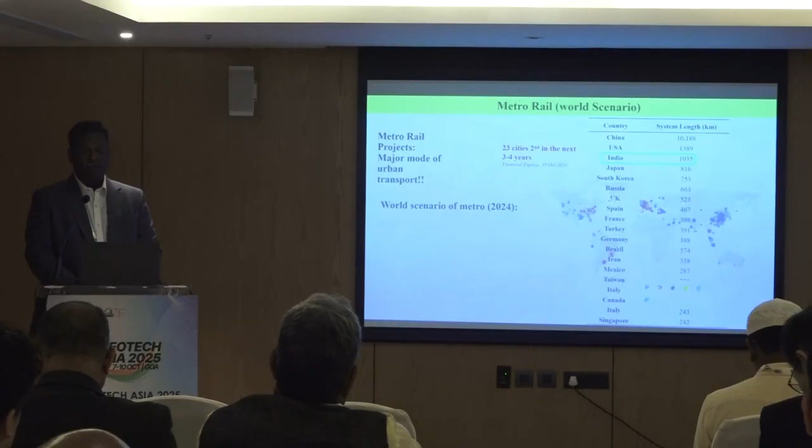A lot of metro rail project initiatives have been taken in India. If you look globally also, the running kilometer length of the metro has been given. India is currently third, and with the kind of metro projects being projected and running in another 23 cities, it is going to be the second largest metro network in the world in the coming 3 to 4 years. We are currently having an operational length of about 1035 kilometers.

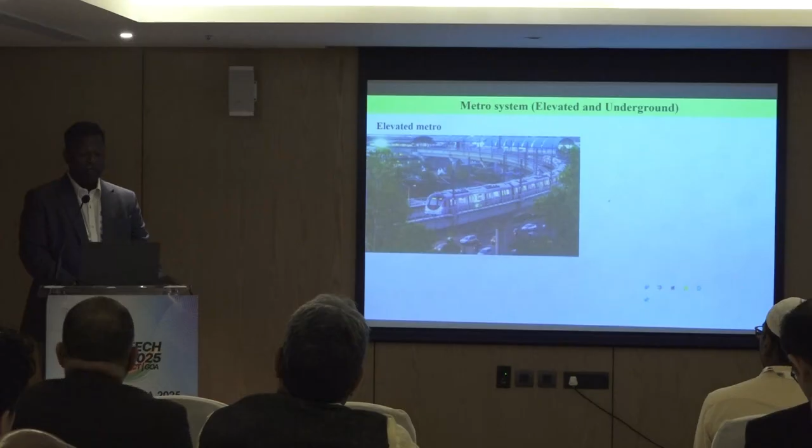But many times, for certain geographical locations where we would like to develop connectivity, it is not possible to go elevated because the existing density of building population is going to be much larger. So the only way is to go underground. If other options are ruled out, then we go for the underground metro option.

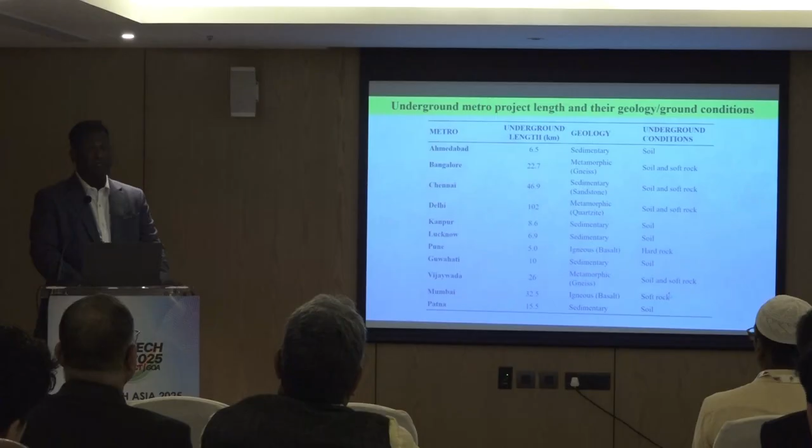Advantages, no need to say, in densely populated buildings where you want to protect heritage structures—in all those cases when there is no space available for an elevated corridor, we go for an underground metro. This is the geological condition the underground metro is experiencing in Indian regions: many sites were soil and some sites were rock, even hard rock—a wide range of geological conditions.

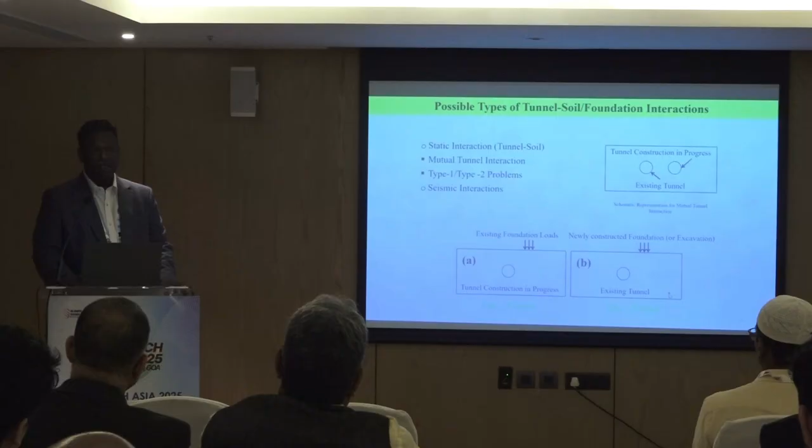So what is the problem we are going to address? Basically, underground tunnel construction involves two problems. The first is the effect of tunneling-induced excavation on existing structures. That is an important problem to address, and quite a bit of work has already been executed.

Guidelines are available in different country codal provisions. Even Professor Loganathan has established guidelines, and textbooks are available to evaluate the safety of existing buildings due to tunneling-induced excavation or deformation, whether it is a shallow foundation or deep foundation. Many metro projects actually execute this, identifying the conditions of the building before excavation.

Then during excavation they monitor it, and they also have backup plans in case the monitored deformations and stresses are alarming. So this is being followed as a regular routine practice.

But what would happen if these tunnels are already constructed and become an attraction point for future development? A lot of new development comes close to this existing tunnel alignment. So then what will happen to the safety of this existing tunnel? This problem was not extensively studied.

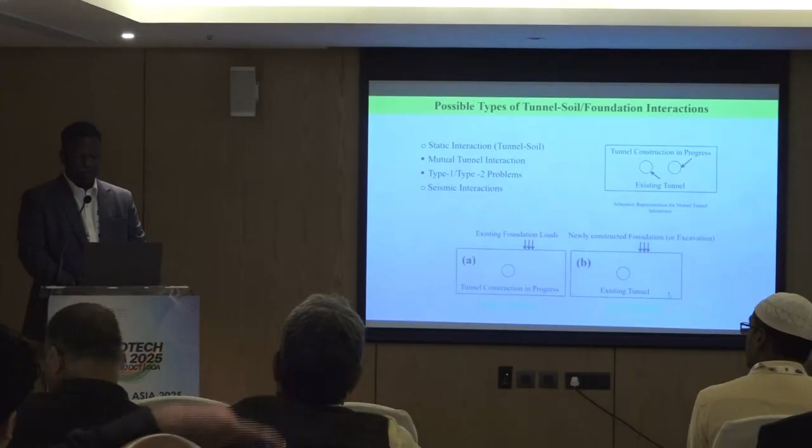We started this work way back in 2010, and for the last 15 years we have been extensively working on this. Some of the findings I am going to present today. So our problem is: what is the effect of new construction or new excavation activity close to an existing tunnel, how will the tunnel behave, and how do we ensure these existing tunnels are safe.

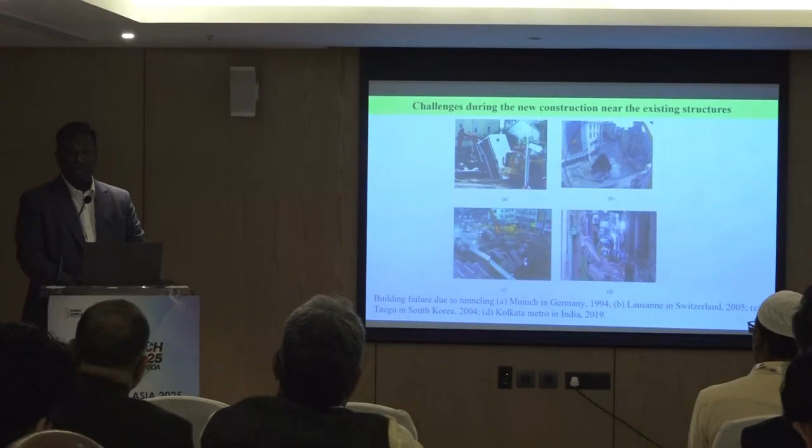As I said, the first category of problem—when you do tunneling, what happens to the pile foundation, how they will deform—these guidelines are already available. But the challenge is that a lot of damage to existing structures has been observed, and is being taken care of. Even in India, Kolkata Metro in 2019 had some damages due to tunnel-induced excavation. This problem is still being researched because existing guidelines continue to evolve as we experience more failures. We learn from the failures, which helps improve the guidelines and monitoring mechanisms.

The kind of strain that the tunnel lining experiences—in some loading it will be compressive in nature, and in another loading condition it will be tensile in nature—needs to be understood, because if the tunnel concrete lining develops tensile strain beyond the permissible limit, it will start developing cracks. These cracks will propagate with time, and the long-term durability of the lining will be affected under groundwater and submerged conditions.

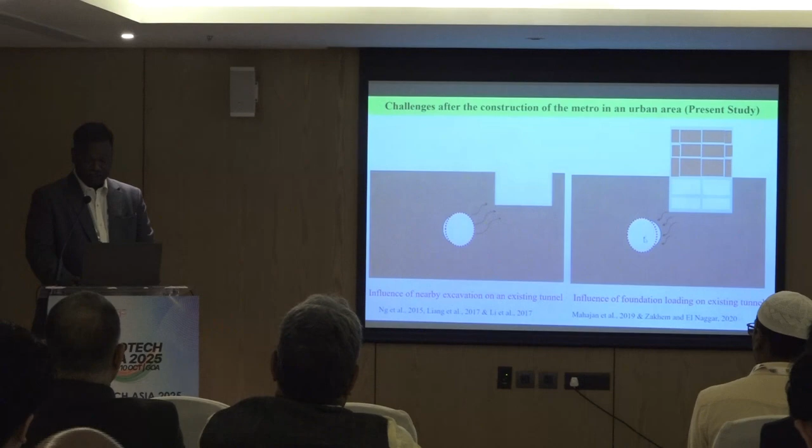Such failures are also reported on tunnel linings, and these are some case studies reporting lining distress, dislocation, or cracks developed at junctions due to new construction activity—which is the focus of attention we want to address.

As I said, basically traffic and land availability is a big issue, therefore we go for this. Typically even a raft foundation or shallow foundation is not likely to produce a deeper pressure bulb. Tunnels are generally about 18-20 meters deep—that's a minimum for a single alignment, unless two lines are crossing, where the second line may go to a deeper depth of 30-35 meters. But then the shallow foundation pressure bulb is very confined to a shallow depth. These days, however, basements are increasing in depth.

We are actually utilizing the underground basement space. In India, 5 basements have already been constructed in Ahmedabad, so we can understand how deep we are going for the basement. Also, when 2 metro lines intersect, we require a depth of excavation of the order of 40 meters, so they are definitely going to interact with the nearby existing tunnel.

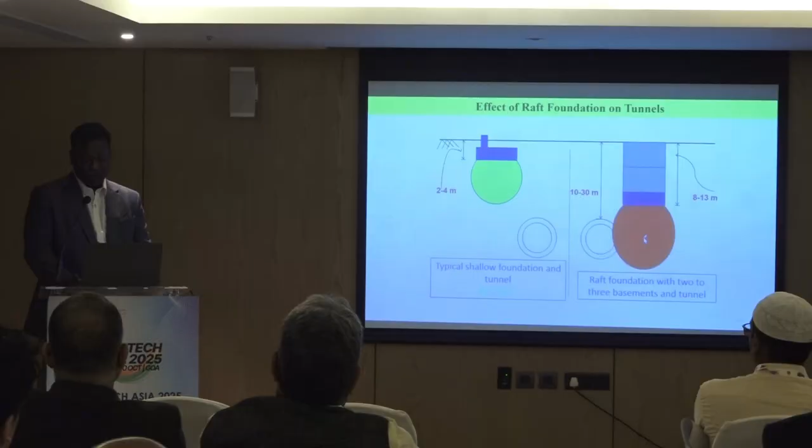Therefore it is very important to investigate this, and in this study we considered up to 3 basements, which is most common. 5 basements is very rare and unusual, and can be carried out as a site specific study. We studied the effect of 3 basement excavation up to a 20-story building, the tallest building normally constructed around Delhi, since we initially considered Delhi as the study region. Of course, this can be further extended to cities like Mumbai, where the number of stories goes much taller.

These are the different parameters that we varied: the horizontal offset distance between the proposed raft foundation and the tunnel lining, the magnitude of loading, and the depth of tunnel cover, since between the elevated and underground sections there will be a transition zone where the tunnel is of shallow depth. So we varied the depth of tunnel as well as the depth of foundation, along with different sizes and orientations of the raft foundation.

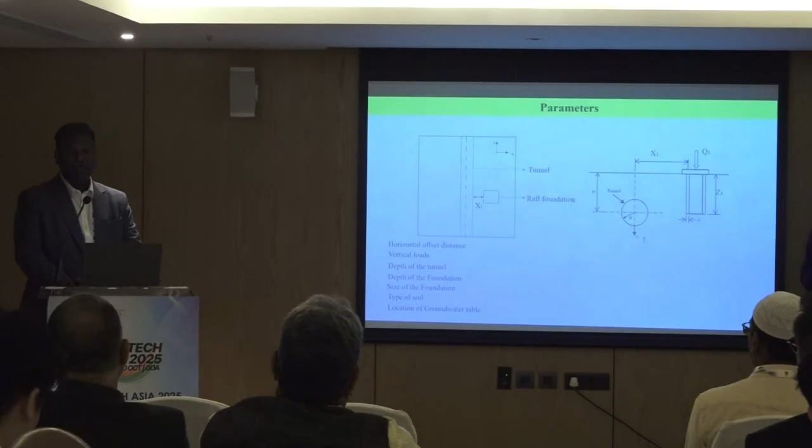A very comprehensive numerical analysis was carried out. But in experiments we could only do a limited study, because geotechnical model testing involves a lot of effort. So we varied the effect of water table also in our experimental study. Concrete stiffness would be too strong to show any strain in the model experiment.

We needed to scale it down, so we used a flexible material called HDPE pipe to simulate the tunnel, and scaling laws were employed to achieve the same flexibility ratio in the field as in the simulated model.

Two soil conditions are very predominant in the Delhi region: one is Yamuna sand close to the Trans-Yamuna river region, and in the western and southern parts of the region, silt is predominant. So we accounted for a wide range of soil conditions.

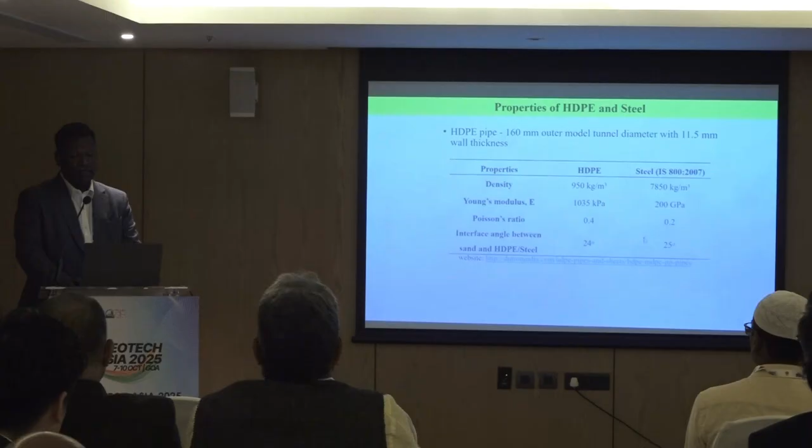We carried out characterization of this basic soil, and scaling laws, as I mentioned, were followed. This is the property of the HDPE model tunnel that we used, and of course the steel as well.

To simulate the basement raft cum retaining wall, which in the field would be RCC, we scaled it down to a steel one. This is the basement raft and retaining wall, which we fabricated integrally, since in the field the raft cum retaining wall is also monolithic. We simulated the same thing.

For carrying out excavation, we need a sheet pile wall, which we designed based on the prototype 3 basement depth of 12 meters. After scaling, we arrived at the thickness and everything. The only difference is that in the field, for 3 basements, you would be using struts and other supports - an anchored sheet pile wall would be used.

But in the model test, confining stress is very low due to the very small depth, so that was not required. With the cantilever sheet pile wall itself, we were able to do the excavation. This is the sheet pile wall that was fabricated to simulate 2 basement and 3 basement conditions.

This is the model setup that we used - a test tank of about 1.2 meter by 1.2 meter by 1.5 meter height. This is the model tunnel lining where we used instrumentation to measure strain in both the longitudinal and circumferential directions.

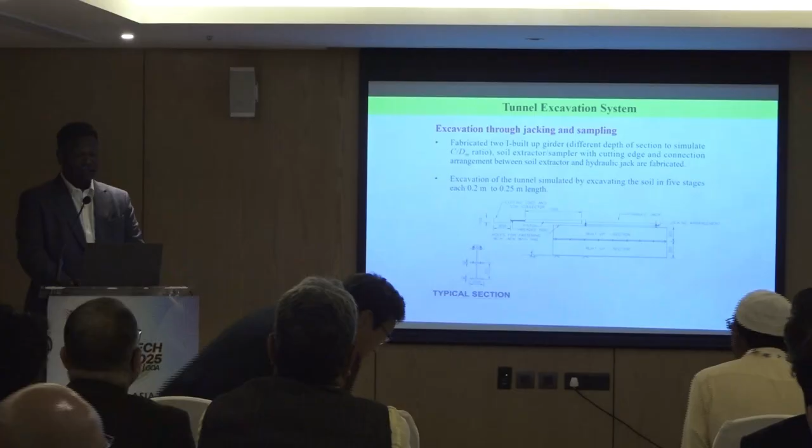A data logger was used - a 48 channel data logger from HBM, Germany. The excavation was done by a tunnel excavation system designed and fabricated in-house, using a hydraulic jack placed horizontally that pushes the sampler into the tunnel to remove the soil within the tunnel during excavation.

This is the extension rod, which can be connected to reach a deeper horizontal length of excavation inside the tunnel. The soil bed has to be prepared at a particular density, and we took 60% relative density, which is predominantly available around the Delhi region.

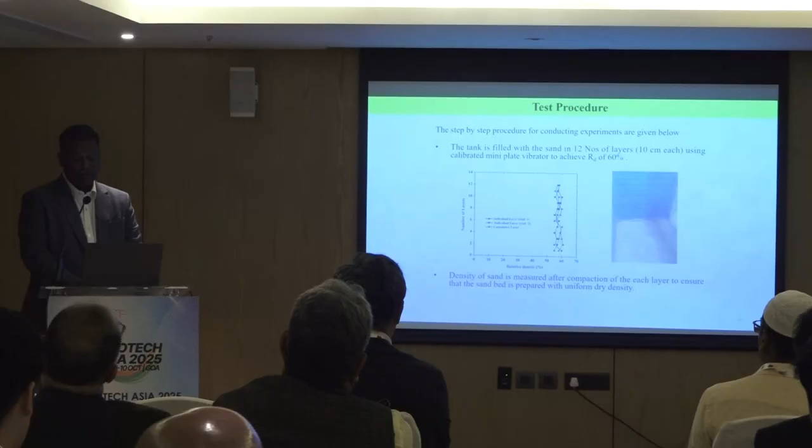In order to prepare that, we had a calibrated method - a plate vibrator method was used to compact the soil, and we verified this through several trials to check repeatability. We were able to achieve about 55 to 60% relative density.

And this is the way, yeah. Okay, sure.

Almost done. This is the way the soil bed was prepared. A pre-filled tunnel lining was placed, and then subsequently the other layers were placed. Then the tunneling was done through the excavation system. Then the soil excavation within the sheet pile was done. Then we lowered the retaining wall with basement, and subsequently building loads were applied. So this is the way it was simulated.

Their construction stages are mentioned here, and we have monitored the strain which are presented here. We can see the first stage, excavation number 2, that is the excavation stage, and subsequently the other stage includes increasing the loading phases of the additional floors.

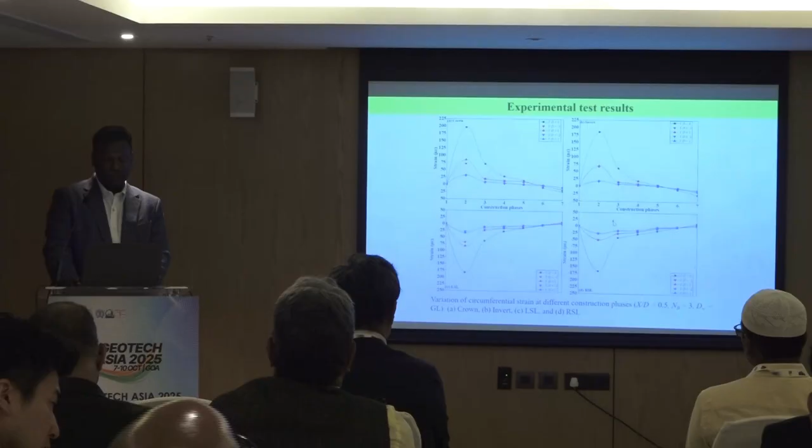What we observed is that the longitudinal strain is relatively smaller compared to the circumferential strain, because your tunnel is running longitudinally and you are excavating in a specific layout of raft. So more effect is on the circumferential direction rather than in the longitudinal direction.

Tensile strain was generated at the crown during the excavation, and the opposite at the springing level. But when you go for the loading, the strain direction changes, whereas the crown experiences compressive strain and the springing levels experience the opposite. So that means there is a strain reversal.

If that kind of cyclic strain happens under fatigue, the concrete is more vulnerable to fracture, cracking actually. These cracks may not cause significant instantaneous collapse, but with time, when moisture ingress happens in the submerged condition, it will also deteriorate the reinforcement bar in the lining. The long-term stability is going to be affected, and one fine day if you do not monitor this, a sudden collapse may occur actually.

So therefore, when we do any new construction, it is important to monitor at critical locations, and in order to identify critical locations, our findings would be helpful to decide where to place the sensors to monitor during new construction operations. In fact, in some cases the permissible strains were exceeded. 150 micron is the permissible strain, and in some construction cases we found that it is exceeding the permissible limits.

It would have been ideal, or at least to compare the data, if you had shown a borehole log data of those foundations, deep foundations versus shallow foundations, because you're talking about SPT numbers up to 50. It's very good strata, but in this locality we already know that 3 to 4 meters is hard strata, and below that you have very soft material, shaly soil or something you call it, right? Would be laterite, yeah. So is there any challenge that you see, or is it something your pressure distribution accounts for?

Yeah, maybe. Very well, very well. I hope you have taken care of those conditions. Yes, sir, this bridge is already in operation. I know, sir, I know. There is no doubt about it, but just from a geotechnical point of view, going to the port, so all these heavy loads are being taken. Yeah, thank you so much.

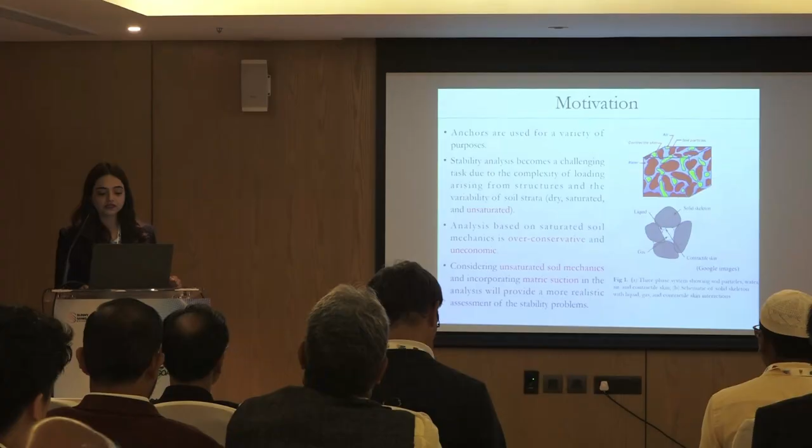Starting with the motivation: anchors are used for a variety of purposes, but in field the soil is mostly unsaturated, so analysis based on saturated soil can turn out to be overly conservative and uneconomic. To consider this, we have to account for unsaturated soil mechanics, which is done by considering the effect of matric suction in the analysis, making our analysis more realistic for the stability analysis.

Next, the introduction. The aim is to do plane strain stability analysis of vertical plate anchors in unsaturated soil, with the constant aim of enhancing the resilience, safety, and cost effectiveness of our designs. The objective is to develop a numerical solution framework and do a comprehensive parametric study of various parameters. Some key contributions from this work: we have proposed a finite element limit analysis based numerical model which incorporates matric suction, and we have proposed some design charts which can be used by engineers in the field directly.

Next, the methodology. I have used the lower bound finite element limit analysis, which includes various constraints: element equilibrium, statically admissible discontinuities, boundary conditions, and the yield criterion. These are all the constraint matrices. Then there is the objective function. All the constraint matrices are assembled, and finally an optimization is performed on the objective function to obtain the total collapse load.

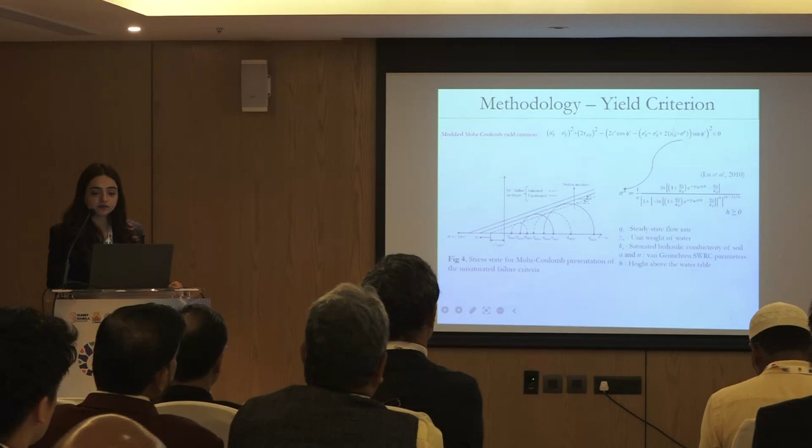For the yield criterion, we have used the modified Mohr-Coulomb yield criterion. The figure shows the stress state for the modified Mohr-Coulomb yield criterion. We can see that as suction increases, the failure envelope shifts higher and higher, which means that in unsaturated soils the shear strength will be higher compared to saturated soils. This sigma term here is called the suction stress, and the equation for this was presented by Lu et al. in 2010.

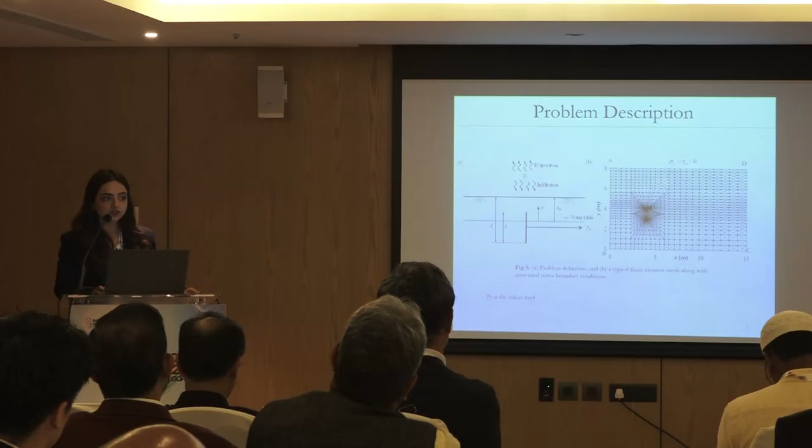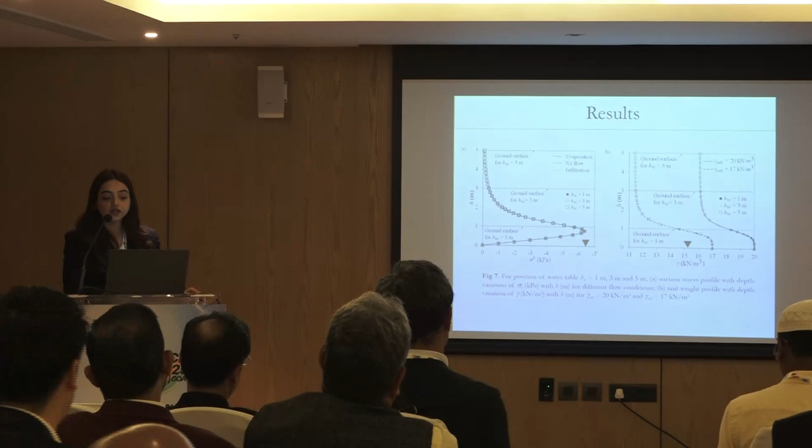From the first figure we can see that the suction stress does not change much with the change in flow conditions. For evaporation, no flow, and infiltration, all these lines are merging with each other, just one over another, in case of sands. So the effect of the flow conditions on the suction stress in case of sand is negligible.

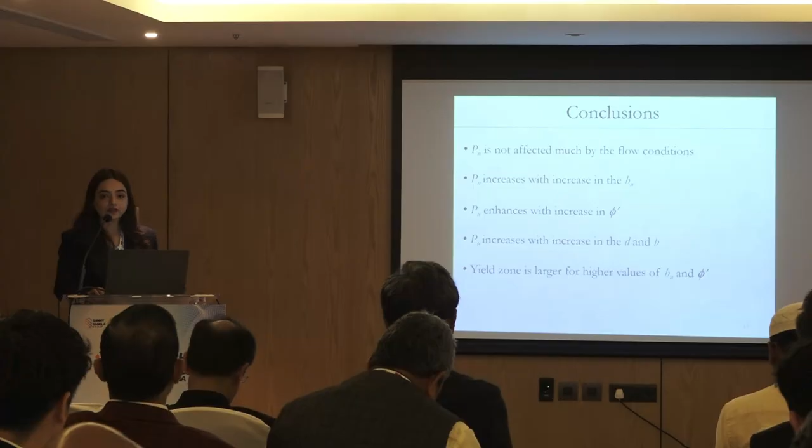Coming to the conclusions from this presentation: we could see that the collapse load or the pull-out load of the vertical anchors is not affected much by the flow conditions. However, it increases with increase in the depth of the water table, with increase in the angle of internal friction of the sand, and with increase in the embedment depth of the anchor plate and the width of the foundation. The yield zone is larger for higher values of depth of water table and angle of internal friction of the sand.

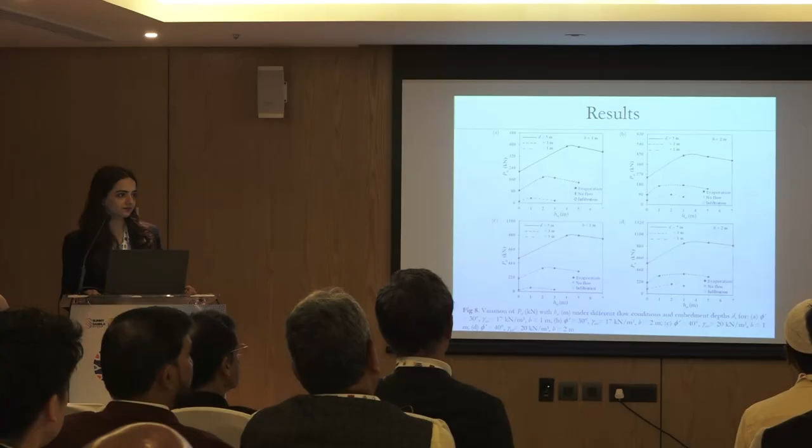Yeah, please, you can actually interact with her a little later. But I have a follow-up question. Because in most of these cases, if you have a sandy environment, the very high permeability will take off your suction. So do you see any effect of suction on the pull-out capacity?

It shouldn't be, generally. Actually, from this equation we can directly correlate the permeability with the suction stress. This term is derived for all types of soils, because here the different parameters are alpha and Ks, which is the hydraulic conductivity, and it is different for different types of soils. So this equation is valid for all types of soils, and from here we can relate the hydraulic conductivity with the suction stress and then directly to the pull-out capacity of the anchors.

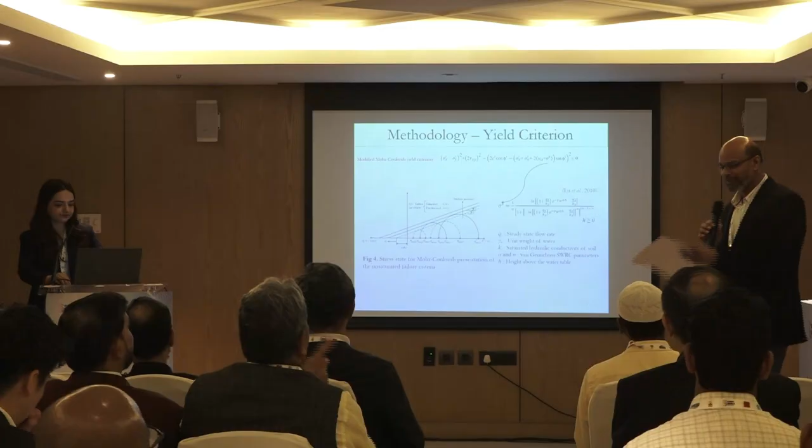Deep soil mixing with steel inclusion for 10-meter excavation support.

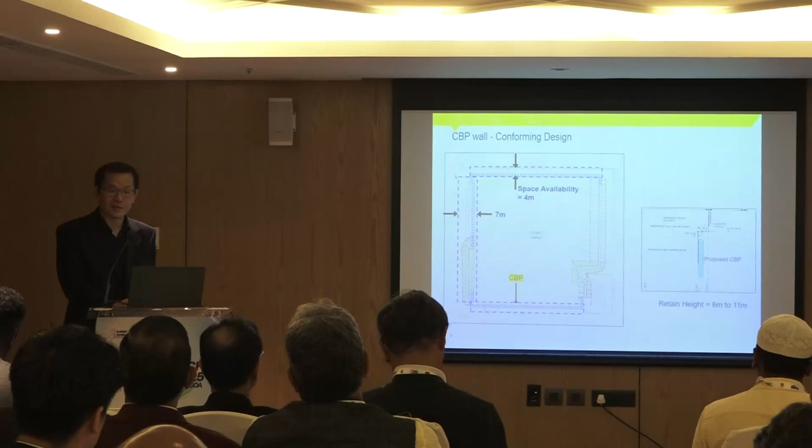In the conforming design, the clients use CBP wall. CBP wall construction can be quite troublesome, and also needs a lot of testing. So after we looked at the soil profile, the surface is firm to stiff clay, followed by firm to stiff to hard soil. Looking at the soil, it's not so bad.

So after a few discussions and analysis, we decided to use deep soil mixing to support the excavation. This northern side length is 74 meters, the depth is about 10 meters. This western side is 69 meters, also a public road.

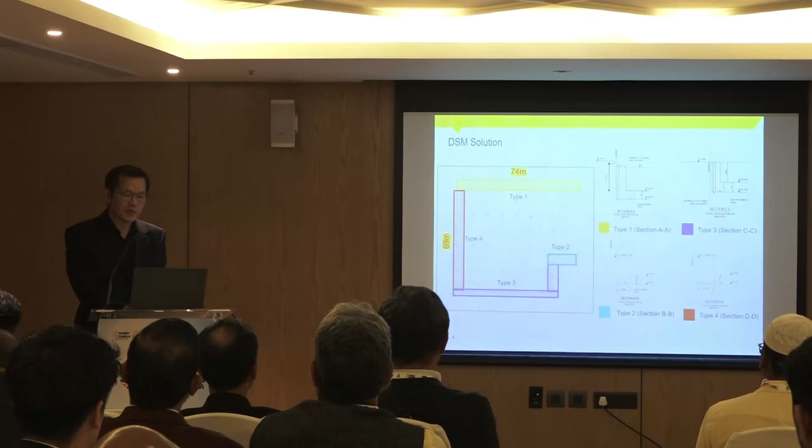We have used 4 types of deep soil mixing. Type 1, because this space is very small, only about 3-4 meters, for 10 meters excavation that's not sufficient to build up a gravitational retaining wall. So in this case, we add steel inclusion in the wall. But of course we had a discussion on where to put the steel. It's similar to a beam model, but on this side it's more realistic to take the tensile force.

This side also has very narrow space, also with steel inclusion. On this side, we have enough space to build up a gravitational system, so no steel inclusions required.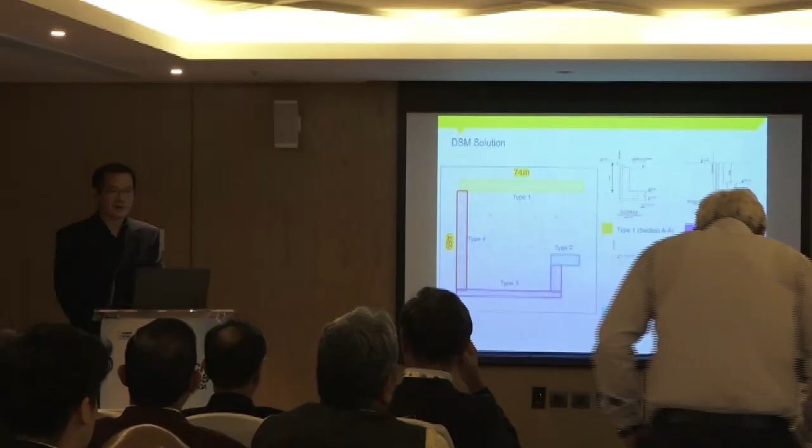For this one it's quite a simple model. For all geotechnical problems, the criteria are quite similar: one is stability, making sure it is safe, the other is looking at performance. In this case the main issue is lateral movement. The client allowed us 60 millimeters lateral movement for a 10 meter excavation. So that's our design criteria.

Because the surrounding area has roads and some buildings at a certain distance, we have done quite a lot of monitoring: building monitoring, groundwater table change, lateral movement, especially for wall deflection. We have installed quite a lot of inclinometers.

Let's zoom in to show Type 1. This DSM wall at this site is only 3.4 meters. We include a little bit extra to make sure it won't be kicked out. The deep soil mixing can be quite strong, with an unconfined compressive stress of about 1 megapascal.

But with that, we worry the soil is not strong enough and can be kicked out. So these 3 rows, the shallow depths, are just below the excavation level. These 3 rows run the full length from the surface to the bottom, with the steel inclusion here. We won't go into much detail, the bottom will be 3 meters.

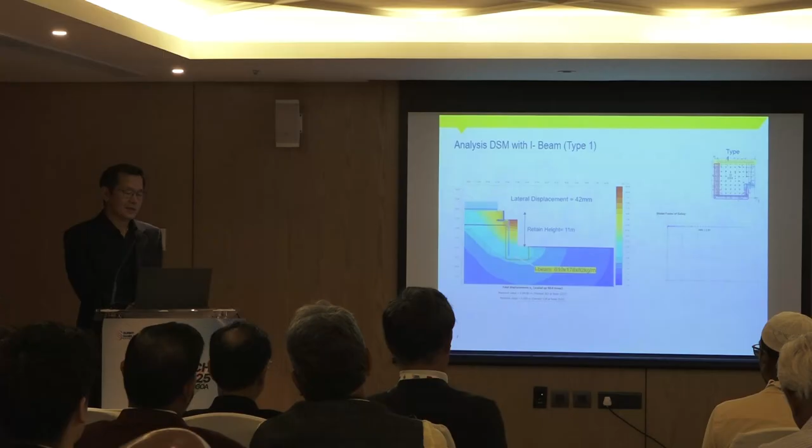Simple analysis has been done using hand calculations, and also a simple PLAXIS 2D analysis to check the deformation and stability. Basically this model is very simple: you install the strong block here, you have steel inclusion, so the failure slip will be below this block. Of course we need to make sure this block itself has enough internal stability, so it doesn't collapse. If this body is strong, the failure slip will be here.

It's quite simple. In this case we don't have sand, fortunately, otherwise water table drawdown would be the problem. Factor of safety is enough. Usually in Malaysia we design permanent structures to have 1.4 and temporary structures 1.2 factor of safety.

These 2 pictures show the construction in progress. I used the API TM22 rig. Just to highlight, in this case because the soil is quite stiff with low moisture content, it's actually not so good for deep soil mixing. For deep soil mixing, it's better for clay with moisture content close to the liquid limit, which is easy to mix. Because this soil was a little too dry, we added some water to cure the soil. So the first cycle we go down just with water, adding water inside to cure the soil.

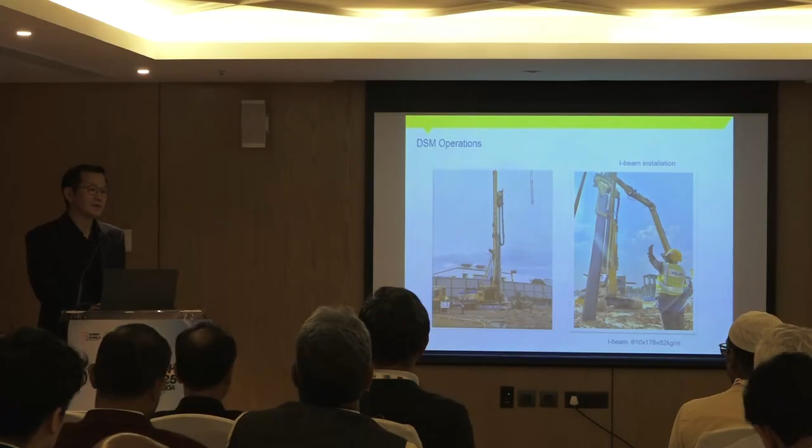Then second round we add the soil cement grout. This picture shows the steel inclusion pushed into the DSM. Usually we do it the second day after the deep soil mixing, when it's not so hot, so it can quite easily be pushed into the DSM column.

This picture shows the soil quite stiff, and even when we add some water to cure it, it's still very dry. So of course for the quality check, after installation at certain days, we collect samples to send to the lab test to see how much strength can be achieved.

In this particular case, we have got 36 samples. I just showed this from the highest to the lowest. At the lowest, you look at about 90% has passed the 1 MPa UCS, which is considered okay. The highest is very high. That's the challenge of the uniformity of the construction.

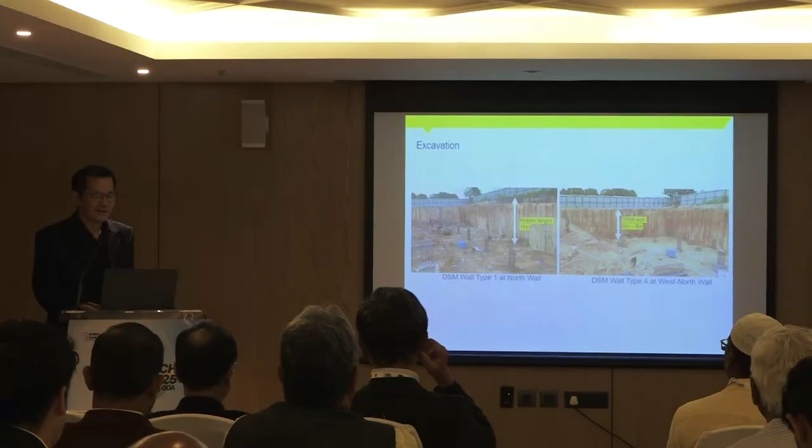This shows construction done, the excavation done. We are looking at the results every week to make sure the movement is acceptable. Some inclinometers, most of them are okay.

Predicted 42 mm, this 29 mm, good. This good. However, this corner almost reached 60 mm. But because of the pile cap construction, they have trimmed this DSM, about 3 meters trim, about 300 mm, which caused some more movement, I think.

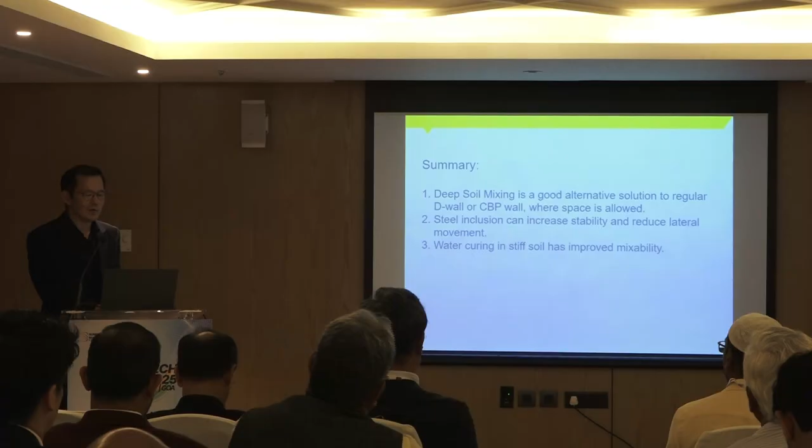That's all good. So just a quick summary: this DSM would be a quite good alternative solution to D-wall or CBP, if the space is enough. If it's slightly less, you can add steel inclusion to compensate where there's not enough width. Water curing can be important in some cases, since it's very dry. With this, I'd like to say thank you.

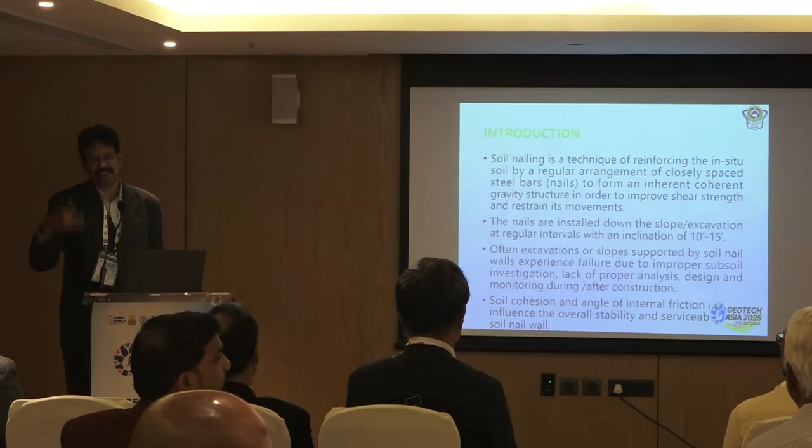Generally, the most resorted technique for soil retention is soil nailing. These nails are installed down the slope or excavation at an angle of 10 to 15 degrees with horizontal. Mainly the stability of the soil nailing system depends on the shear parameters of the soil into which the nails are introduced, mainly soil cohesion and angle of shearing resistance.

Most often you will see, while excavations that are supported by soil nailing, either driven or grouted nail systems, sliding of the soil mass along with the nails. This happens generally when you do it in sandy soils containing very low cohesive strength. Whatever 7 kilonewton per meter square is specified, sometimes it poses problems whenever the depth of excavation is more, so an investigation has been made.

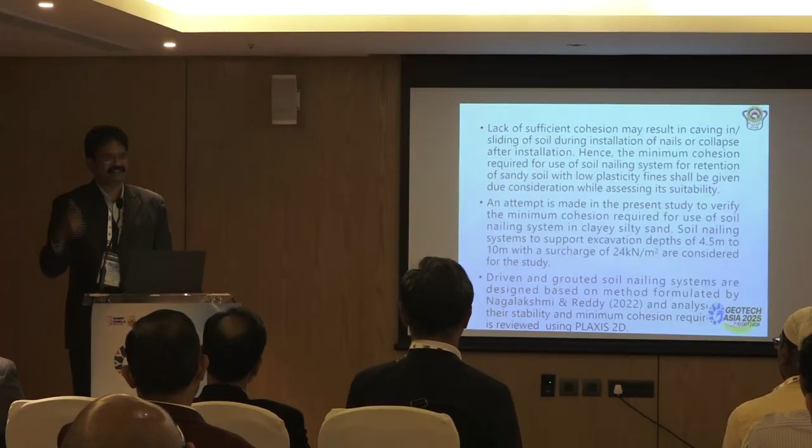In our Andhra University campus we have the presence of clayey silty sand. In the area surrounding Andhra University, many constructions are coming up, and we have witnessed such failures of sliding when people were trying to stabilize, particularly when they are excavating beyond 6 meters or so. That's why this study has been taken up.

So the properties of soil from our campus, based on gradation and plasticity characteristics, get classified as SCSM, and it has a cohesion of 8 kilonewton per meter square and an angle of shearing resistance of 31 degrees.

For the analysis, we have formulated a simplified method. We did not follow Gassler's method. We have coupled the failure plane that will be considered in internal stability analysis of reinforced retaining walls. Soil nailed excavation, soil excavation slope, and RE wall more or less will have similar behavior. In a reinforced earth wall, you are constructing and retaining backfill. Here, as you excavate, you are introducing the system, and finally it becomes like a retaining wall.

That's why we have adopted a failure envelope of reinforced earth retaining walls from the coherent gravity method, wherein the failure or rupture surface is considered to be inclined at the bottom and up to half the height of the retaining wall, and thereafter it becomes vertical. The vertical rupture plane intersects the ground surface at 0.3H. Even Gassler reported such two planar wedge surface failure in respect of cohesionless soils. In case of cohesive soils, the rupture plane is reported to be circular.

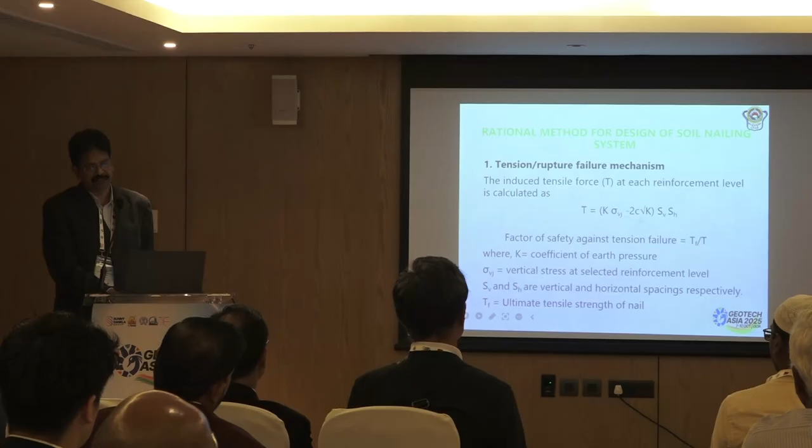The tension induced at each level of nail has been calculated using this formula, wherein we take the horizontal stress acting on the reinforcement into consideration, and multiply it with the area of influence of that nail. That way tension is calculated, and factor of safety against tension failure is determined as the ratio of tensile strength of the reinforcing bar by tension induced.

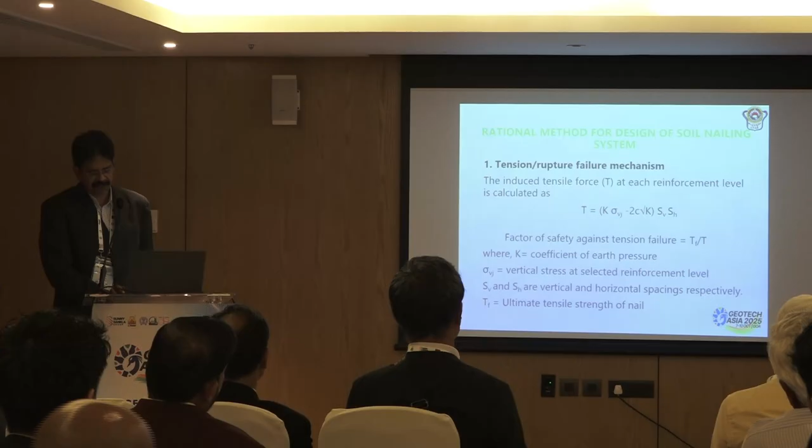As per Federal Highway Administration guidelines, the minimum factor of safety against tension failure should be 1.8. Similarly, pull-out failure is checked by calculating the pull-out resistance mobilized on the anchorage length, the portion of the nail extending beyond the rupture plane.

We calculate the mobilized frictional force, with expressions given. A simple concept: normal force acting on the nail multiplied by tan delta.

If it is a driven nail, it is gamma times Hj as overburden pressure, and pi dl as circumference, which you multiply with the coefficient of friction. In case of a grouted nail, the surface area of the bar in the anchored portion is multiplied with bond strength. We determine the factor of safety by dividing pull-out force by the tensile strength, the tension induced in the nail, and it should be more than 2.

Following these simple formulations, designs have been made for driven and grouted nails for excavations having depth from 4.5 to 10 meters, considering a surcharge of 24 kN per square meter. Normally we consider this whenever a roadway is passing adjacent to the retaining wall or deep excavation, so a 2 meter high surcharge road is considered.

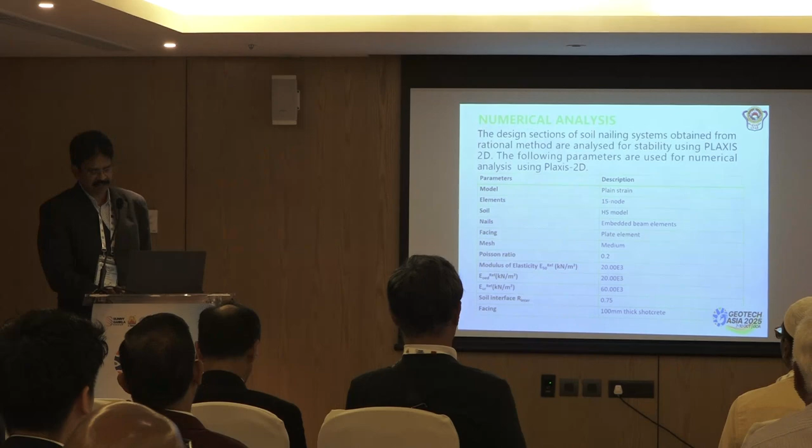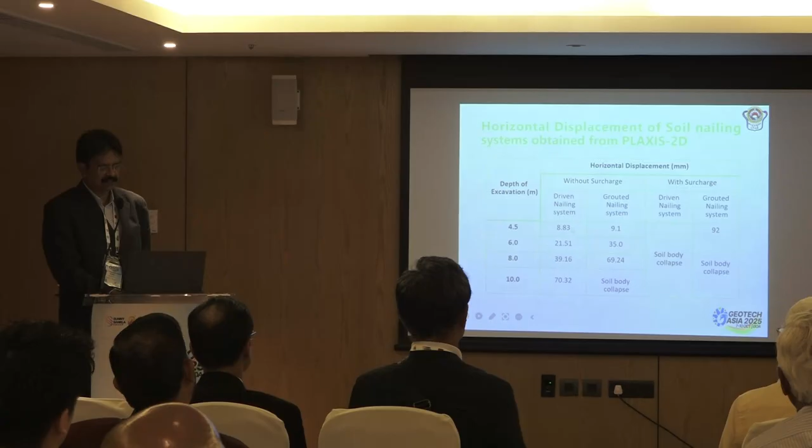If you look at the horizontal displacement of the soil nailing system for driven and grouted nails with and without surcharge, you can see that without surcharge, the driven nailing system has indicated lateral displacements within 0.1 times the depth of excavation.

Coming to the grouted nailing system, it was okay up to 8 meter depth of excavation, but at 10 meter it failed. Coming with respect to surcharge, soil body collapse was observed.

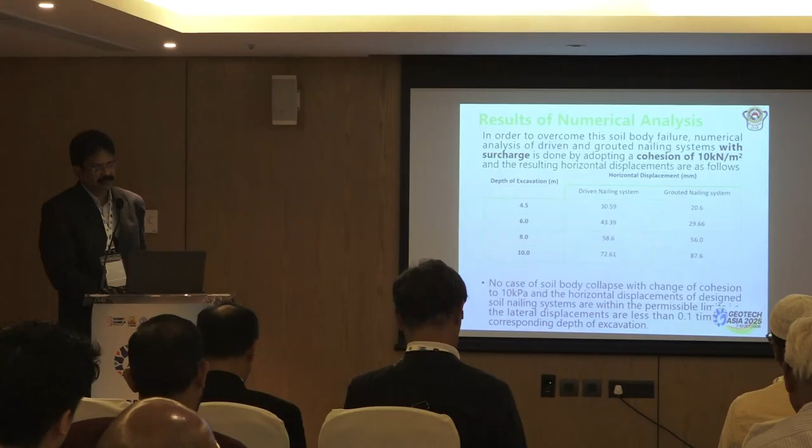So with the value of cohesion strength of 10 kilonewton per meter square, we have obtained for grouted nails as well as driven nails lateral displacements within 0.1 times depth of excavation. So you can see from the 2D Plaxis output, there is no soil body failure and displacement is within limits.

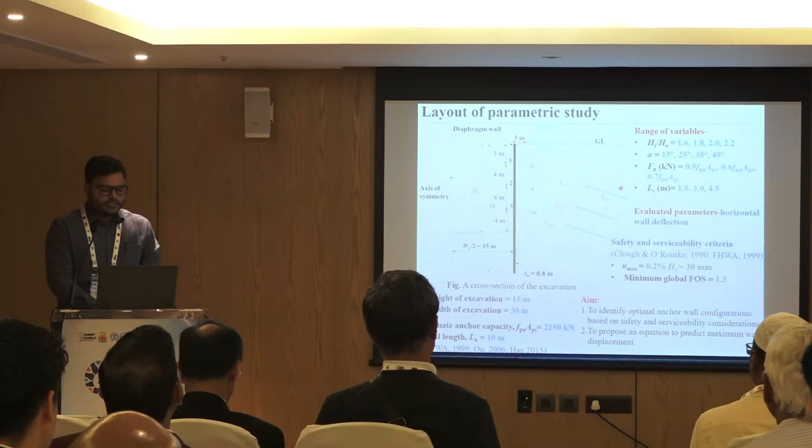anchor pre-stress force, and anchor longitudinal spacing. The anchor pre-stress force has been varied as a percentage of anchor ultimate capacity, which is calculated by considering the adequate factor of safety in the design load, and the design load has been calculated from the apparent earth pressure diagram given by Terzaghi and Peck, with horizontal wall deflection being the sole parameter evaluated here.

So the aim of my parametric study presentation is to identify the optimal anchor wall configuration and to propose an equation to estimate the maximum wall deflection based on these aforementioned variables.

The construction steps involve excavation up to 0.5 meter below the anchor level and dewatering up to 0.5 meter below the excavation level till the completion of the final excavation.

This slide summarizes the important results and discussion. Increase in the anchor inclination angle decreases the anchor traction forces, which results in an increase in the maximum wall deformation, and with increase in the HT by HE ratio, there is a decrease in the wall deflection.

Increasing the pre-stress force and longitudinal spacing will not help reduce the wall deflection after a certain optimal range. So this table gives you different choices of optimal wall configuration.

based on the anchor pre-stress force, anchor longitudinal spacing, HT by HE ratio, and anchor inclination angle. In all of the optimal configurations, the factor of safety is well above the required minimum value.

So based on total 144 configurations analyzed, 110 simulations successfully satisfied the safety and serviceability criteria. Based on multi-variable linear regression, an equation has been proposed to calculate the maximum wall deflection, which contains all the variables.

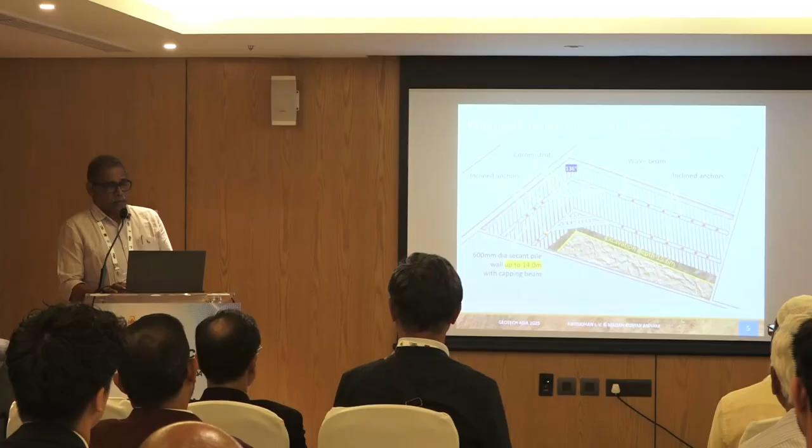So the executed design is something like this. We had a secant pile wall, which was only up to 14 meters, while the excavation depth was 15.6 meters, and we had one level of anchors and corner struts, then another level of another set of anchors and corner struts. You can notice that there is no anchors in the corners; only the anchors are in the middle portion, and corners are supported by the corner struts. We have to notice that the corner is very obtuse, with 136 degrees.

Actually, that was the reason for the failure. And they also put benching after 11.5 meters for about 1.2 to 1.5 meters to add stability to the short pile lengths, thinking that it will add to the stability.

This is the constructed excavation retention system. They excavated up to the final level, put the PCC, and then construction was about to start. Unfortunately, we had incessant rain and a high flood condition, and part of the retention system collapsed.

We had 4 fatalities, and then we had property damage. So these are some of the pictures of the failure condition.

We have this corner strut failed and anchors failed, which pulled part of the road also into the excavation. You can see all the piles were toppled because there was no enough toe restraint, even though they provided benching.

You can see that very interestingly there is no groundwater, despite very high rains and flooding. So we presume that the failure was due to flood water, because the flood water height was about 1.5 meters, which means the system did not have enough factor of safety even with the high water table or any flood conditions.

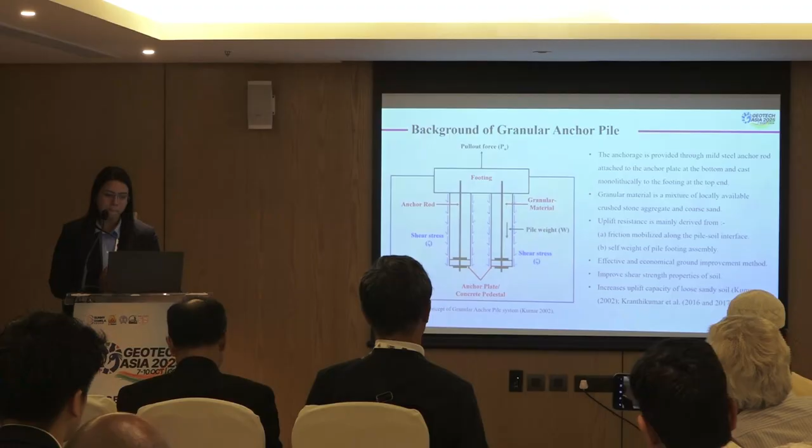Generally, the granular material used in the granular anchor pile is a mixture of locally available crushed stone aggregate and coarse sand. During the tensile or pull-out force, the uplift resistance is mainly derived from two things: the friction mobilized along the pile-soil interface, and the self-weight of the pile-footing assembly.

Few authors like Kranthikumar et al. 2016 and 2017, and Kumar 2002, have documented that granular anchor pile is a very effective and economical ground improvement method, improving shear strength properties of the soil and increasing uplift capacity of loose sandy soil.

The first part of the work is the numerical validation of a field experimental study done by Kumar 2002 on a group of 2 GAP embedded in cohesionless soil.

The details of the experimental study are: the diameter of the pile is kept as 0.3 meter, length is 6 meter, configuration is a group of 2 granular anchor piles, and the depth of the groundwater table in this study is 6.2 meter below the ground surface.

In the modeling consideration, the plan dimension is kept 20 times the diameter of the pile according to Robinsky Morrison 1964 and Kishida 1963. The depth is taken as 1 meter below the pile length, and the spacing is taken as 3 times the diameter of the pile.

The soil volume and the pile are modeled as volume elements. The anchor rod is modeled as a node-to-node anchor. The thickness of the anchor rod is taken as 0.0317 meter.

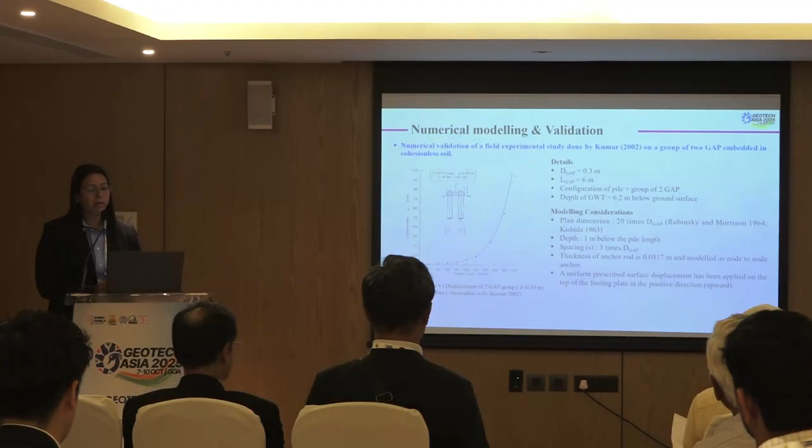For the tensile load, a uniform prescribed surface displacement has been applied on top of the footing plate in the positive, upward direction. The Mohr-Coulomb criteria model is used to define the constitutive relation for the volume elements like soil and pile. To simulate real field conditions, standard fixed conditions are applied to the geometry model.

Table 1 shows the material properties for the soil and pile material. The properties of the pile material are taken from Rao 1982. Table 2 shows the material properties for the pile components like the base plate, footing plate, and anchor rod.

Figure 5 represents the comparison of field test results with the numerical model for a group of 2 granular anchor piles. Kumar 2002 determined the uplift pull-out capacity by the 2-point tangent method, plotted from the curve between uplift force and upward displacement, and reported 170 kN. A similar approach is adopted here, obtained from the Plaxis model, and the pull-out capacity is found to be approximately 165 kilonewton.

The second part is the effect of the groundwater table level. In the first case, the groundwater table was at 6.2 meter below the ground surface. Now, if we increase the groundwater table level to 3 meter and to the surface level, what happens? Figure 7 shows the ultimate pull-out capacity for variations of the groundwater table.

We can see that on increasing the groundwater table, or moving upward to the ground surface, the ultimate pull-out capacity decreases. There is a percentage reduction in uplift capacity from 15.15% to 21.42% as we move upward to the ground surface. This might be because of a reduction in effective stress and so the shear strength of the soil.

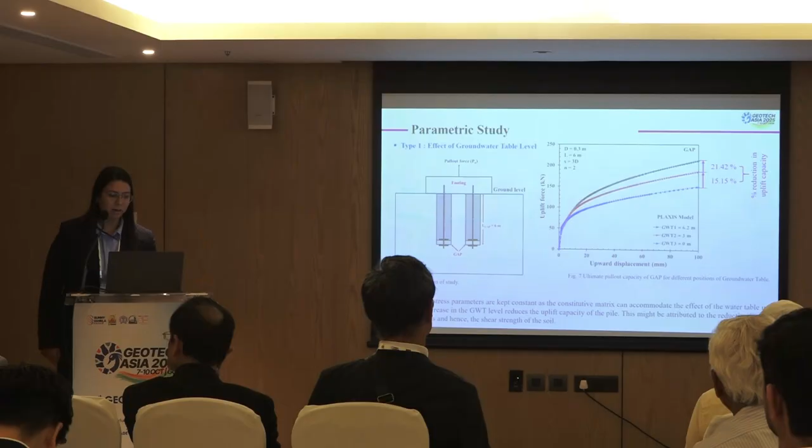Second is the effect of a group of 3 granular anchor piles. What if instead of 2 granular anchor piles we use a group of 3 GAP? Figure 8 shows the comparison of uplift capacities for a group of 2 and 3 GAP. We can see that as we increase from 2 to 3 granular anchor piles, the uplift capacity of the piles increases. The configuration for the group of 3 granular anchor piles is an equilateral triangle.

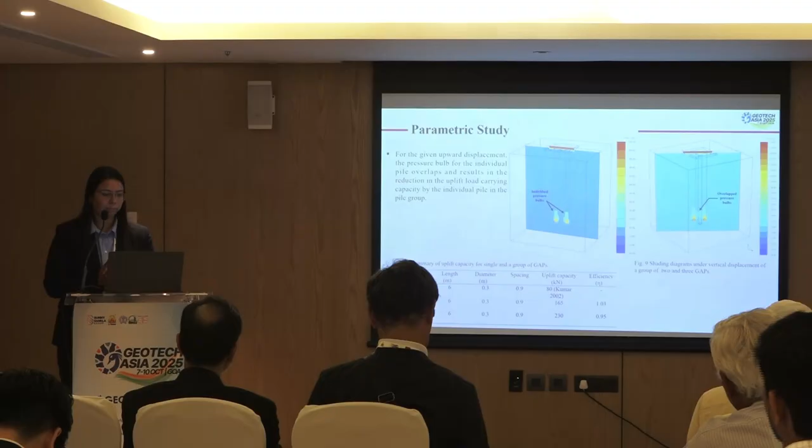Coming to the conclusion part, a numerical model for the GAP is validated with the experimental study of Kumar 2002 using the FEM-based software.

The pull-out capacity of the group of GAP reduces with the rise in the groundwater table. The highest resistance to the uplift force is obtained as 165 kilonewton for groundwater table 1, that is 6.2 meter below the ground surface.

Furthermore, as we increase the groundwater table level from 3 meter to the surface, the pull-out capacity decreases from 140 to 110 kilonewton because of the loss in the shear strength of the soil.

The last finding is the efficiency of the group of pile decreases as the number of piles increases from 2 to 3, by virtue of interaction effect. This is due to the fact that for the given upward displacement, the pressure bulb for the individual pile overlaps and results in reduction in the uplift load carrying capacity of the individual pile in the pile group.

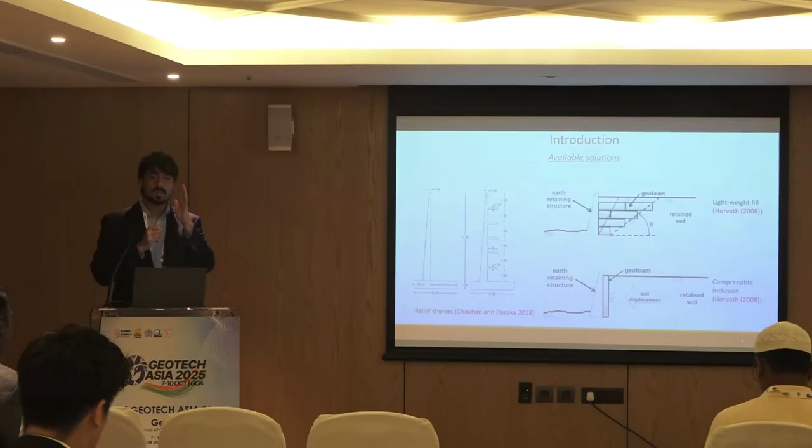So what is happening? There is a wall. When we are placing a compressible material, instead of wall movement, the compressible material will compress, and because of that the soil state will change in the soil from at rest to active. So I will be focusing on that only.

And for our inclusion material, we have used geofoam, which is scientifically called expanded polystyrene. So it is like a thermocol type of material. There are several properties which make it a suitable construction material, and the main thing is they have predictable stress strain behavior, and it is a manufactured product. It is environmentally safe, it doesn't generate leachate and everything.

There are lots of studies that have been done through numerical modeling, through physical modeling, and even by us also. We have performed field testing and numerical modeling, and what we found from the literature survey is that when using normal material, the pressure is reducing on the wall in the range of 10 to 78%, depending on the type of wall and the loading conditions.

But there is one issue with this material: because it is a manufactured product, it has some cost, which restricts its application. And what we found is that the efficiency of geofoam depends on the thickness of the geofoam. So as the thickness increases, the pressure reduction increases.

So we did some literature review and found about an elasticization process. Suppose this is a normal geofoam. If we compress it and then remove the load, it becomes a totally new product, called elasticized EPS or elasticized geofoam. This simple cycle of compression and recompression creates so much difference.

If you see the behavior here... okay, I have this highlighter, it's visible. So this is the behavior of normal geofoam.

You can see that after reaching a certain extent, it starts yielding uncontrollably. When designing the compressible inclusion, we make sure our strain limits are within this range, and this is only 1%. But because of this cycle of compression and recompression, that behavior changes.

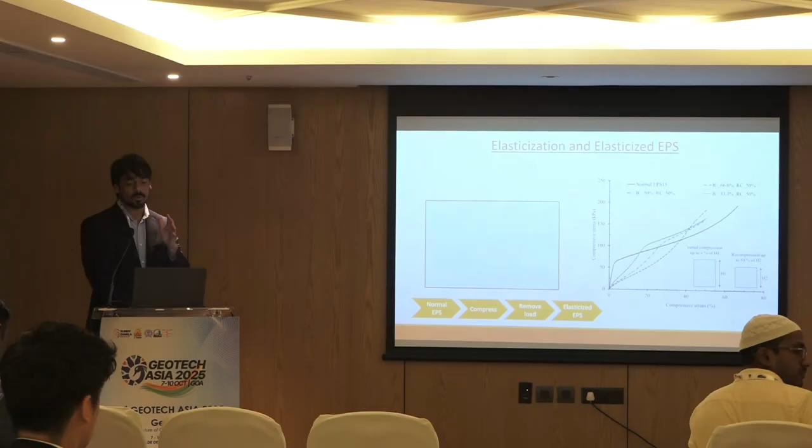Suppose if we compress this material to 66% of its initial height, then the behavior is this one. It becomes highly compressible and shows linear behavior, so the strain requirement or creep problem can be avoided.

Similarly, if we compress the material to different amounts, it shows different behavior. So we have control over the rigidity of the material, which is not the case with normal geofoam.

Now we had done some field testing with normal geofoam, and also numerical modeling. We utilized this model and prepared the numerical model, where we compared the performance of normal geofoam and elasticized geofoam.

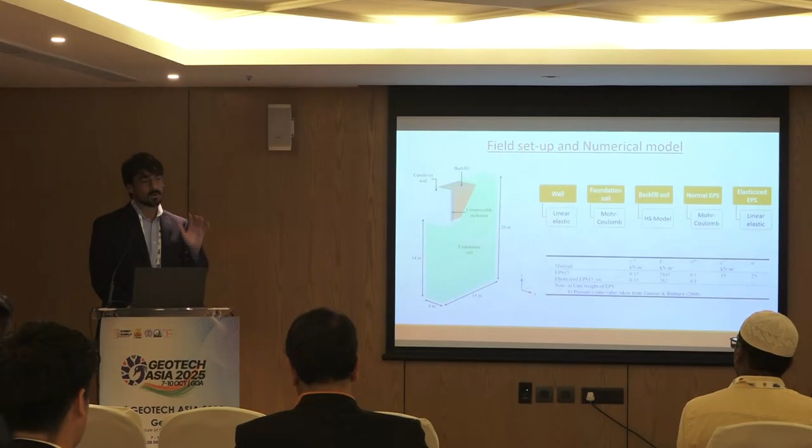This was the numerical model we had done, and these are the constitutive models we selected for all the materials: wall, foundation soil, backfill soil, normal EPS, and elasticized EPS. For all four materials we have validated through literature. For elasticized EPS we selected a linear elastic material because in our testing the strain range was within the elastic limit only, so initially we selected a linear elastic material.

These are the properties. And talking about results, this is the behavior of earth pressure variation along the depth when there is no material. This is the control case.

When we are placing the normal geofoam, if we focus here, this is of EPS 15, that is the density, with 500 mm thickness. Then this much pressure reduction is there.

And when we are elasticizing this material, you can see that the same pressure reduction efficiency we get with normal EPS of 500 mm thickness, we are getting with around 100 mm also. That is, our thickness is reduced by 1/5. On further increase, the pressures reduce further.

This we got from numerical modeling, and strain levels also varied. So this was the summary of the numerical model. This was, what we call, not an in-depth study.

In this conference we have only preliminary studies, and if we see the results here, the efficiency we get with normal EPS is 22% pressure reduction with 500 mm, and if we increase it, it goes up to 30% also.

If we talk about wall deflection, because it is a yielding wall, it will deflect. So wall deflections are also reducing when we increase the thickness and elasticity—here for 32% we are getting this—and a compressive strain summary is also there.

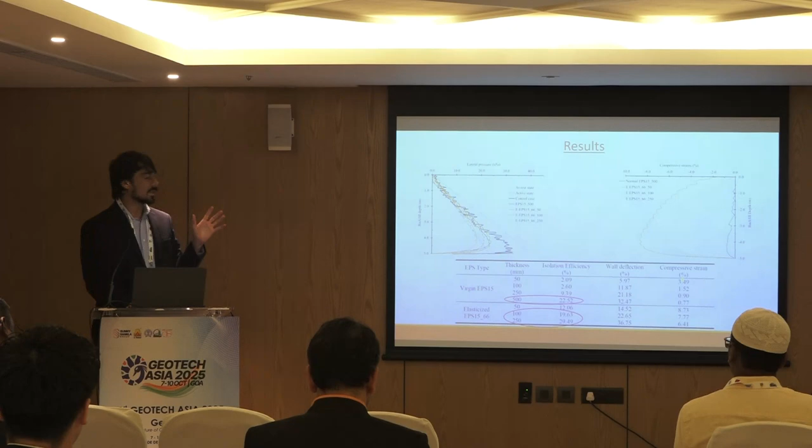I am focusing so much on compressive strain because elasticized material behavior is highly dependent on the compressive strain that gets generated. The major problem is creep.

So from this preliminary study, I can say that elasticization can be an effective solution. It can reduce the thickness of normal EPS drastically without compromising the efficiency of the inclusion system. Also, one good thing with EPS is that we have control over its stiffness—if we compress it by different strains, its behavior changes.

But there are limitations also, because we primarily focused on the static study only. And as I mentioned, we used linear elastic material, but it was having some plasticity also—it was linear, but not purely linear elastic. There is some plasticity. For our study we used linear elastic, so more study is required for elasticized material to understand its mechanical behavior, damping characteristics, and its efficiency for time-dependent loadings.

So this was my presentation. Thank you.

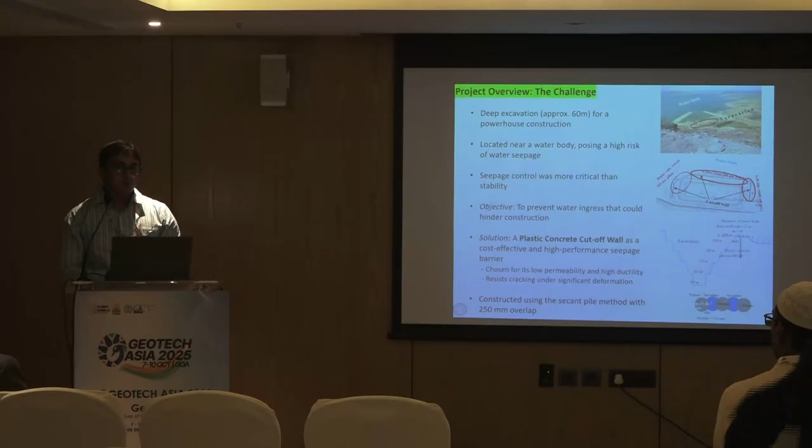Why do we use plastic concrete? If we go the same process using a rigid concrete diaphragm wall, two problems are there. First, it is a huge construction cost. Second, there is no problem with stability when using a rigid structure, but a little bit of deformation creates a lot of bending moment and shear.

We have to add reinforcement. But if you use plastic concrete, which is ductile in nature, when a little deformation happens, it adjusts its position so that it overcomes the local stability concern, and also plastic concrete has low permeability, so it overcomes the permeability concern.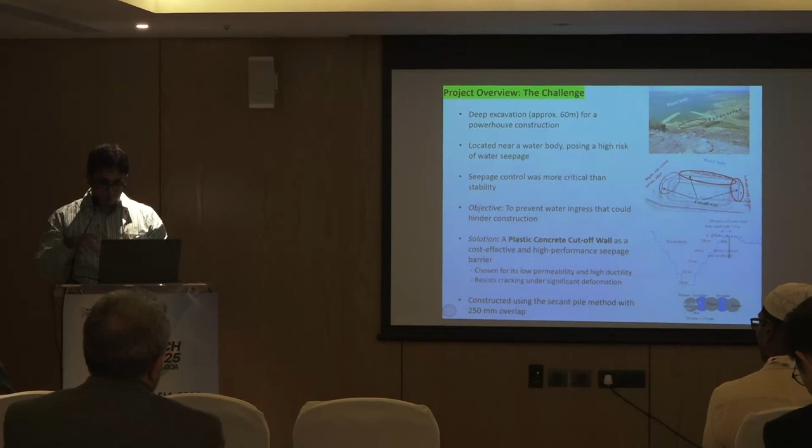In our case, we constructed that plastic concrete wall using the secant pile method - there is a diaphragm wall. How do we develop a diaphragm wall? Using a grab, we excavate it, make a trench, and then fill it with concrete or other material to fill the soil. But here, what we did using the secant pile method means overlapping piling, which reduced the time of construction, and the overlap was 250 mm.

The basic ingredients for the plastic concrete are gravel, sand, cement, and the main key factor is bentonite and water. This water-cement content is conventionally high compared to the actual water-cement used in concrete, and the bentonite actually gives the plasticity, enhances the ductility, and significantly lowers the permeability. It suspends cement particles and gravel, which helps achieve good ductile behavior.

Now the problem is that there is no standard pattern or standard data for what the trial mix should be, how much we have to add, which proportion to use. So what we did, we collected data from the literature - how much UCS cube strength they achieve for different moisture content, what permeability we achieve, what slump we achieve. The guideline is that in our IS code, if we use plastic concrete, the slump should be within 180 to 200.

Another concern is the guideline that our permeability should be within 10 to the power minus 7 to 10 to the power minus 8 meter per second. Now the other thing is how much UCS we are going to use.

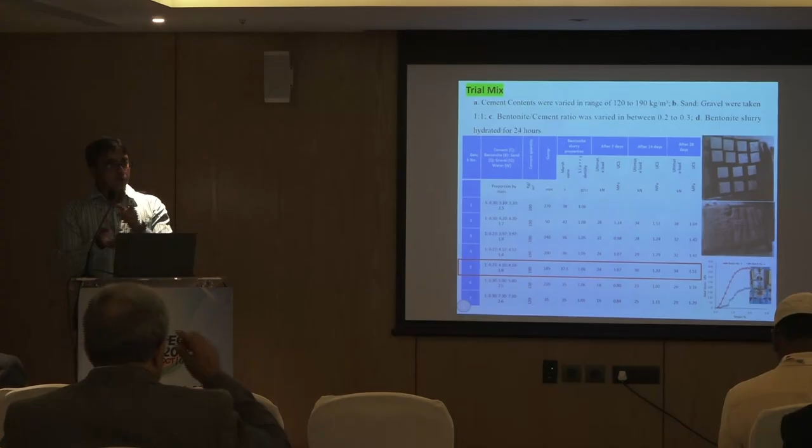So we choose such a range that the bentonite cement ratio, cement content, bentonite slurry, and sand gravel ratio should be like this. From the literature, we did trial mixes and got a suitable one. We chose 1.51 because when converted to elastic stiffness, it matches with the surrounding strata. So we found the elastic modulus and UCS value at 1.51, and this fifth batch was suitable for our study.

Then we did the numerical analysis for the present condition without cutoff wall. How much time, sir? One minute. Okay sir, I'm finishing.

Then we did numerical analysis using finite element methods to find out how much seepage is happening without a cutoff wall versus with a cutoff wall in place. We found that if we go into the rock strata with 2 meters of socketing, it reduces the permeability by 10 times.

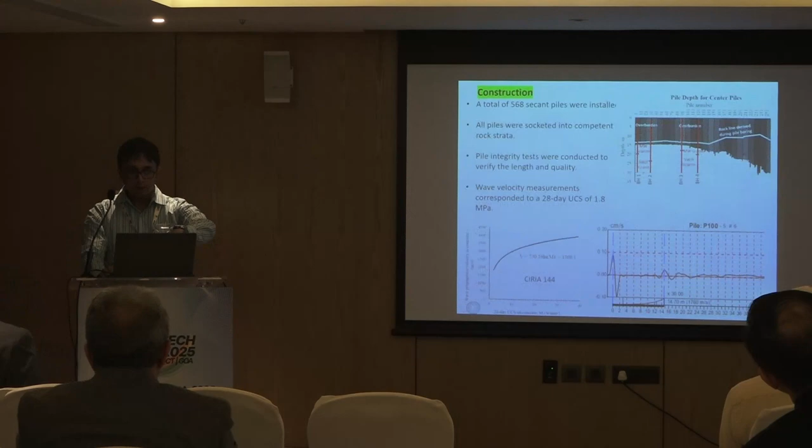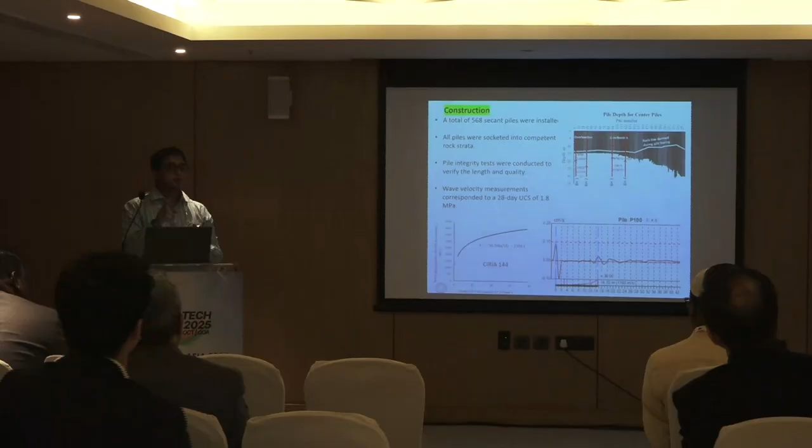We did 568 secant piles, and performed numerous probe holes and bore holes to check whether we are getting the exactly required strata, because sometimes we encounter boulders. Previous borehole studies indicated it should go to 12 meters, but we terminated at 10 meters or 5 meters on getting the hard strata. That's why we did lots of probe holes, and we achieved the target.

The pile integrity test also showed that our piles are proper, and this is our successful outcome. We were able to reach the 60 meter excavation with reduction of seepage. There was a little bit of seepage, but we could overcome it by pumping and storage.

And now you are also become a part of this successful study. Thank you so much. Thank you.

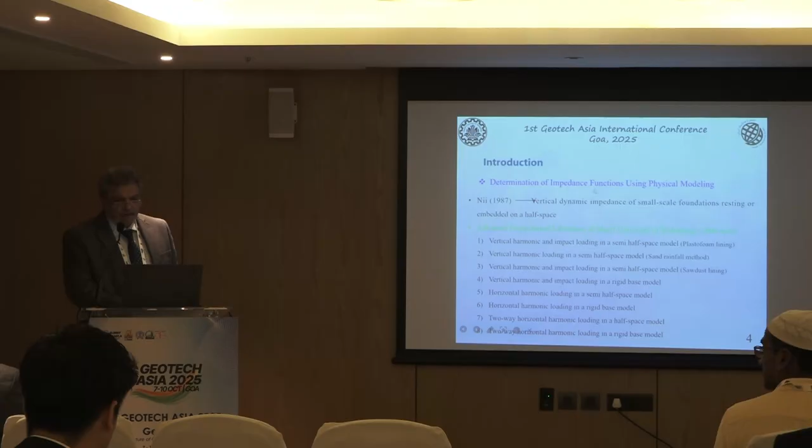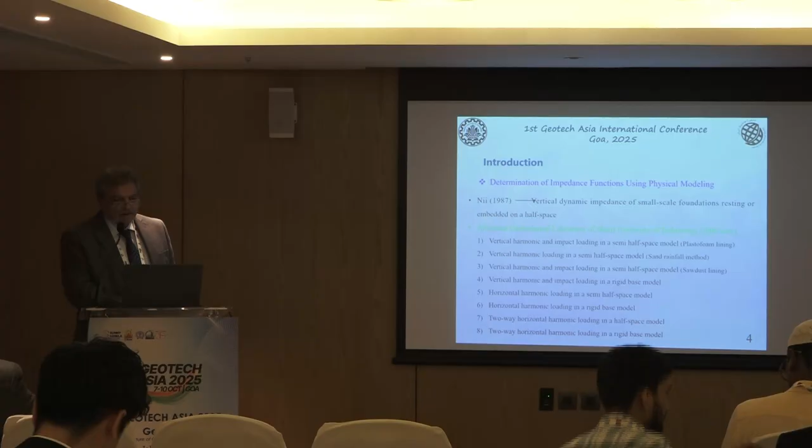There is some literature with real scale tests, some numerical analysis, and of course some limited physical modeling tests. That's why we chose this subject, studying the determination of impedance functions using physical modeling. As you know, impedance functions are the most important parameters used for designing surficial footings in dynamic conditions. For example, the research of Nii in 1987 was done for vertical dynamic impedance analysis on small scale tests.

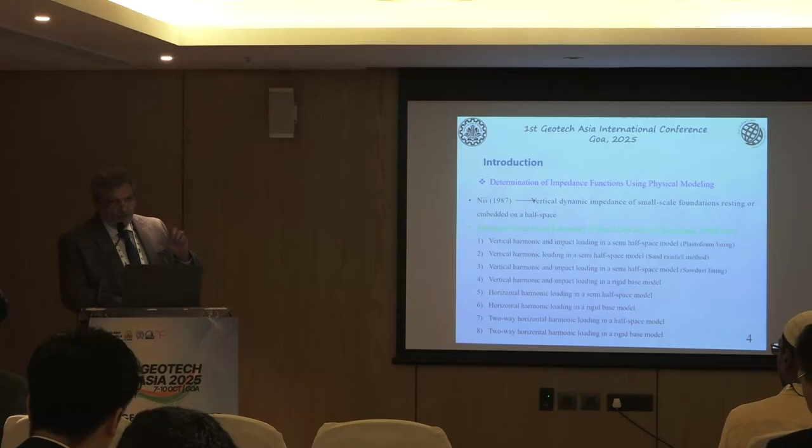As I mentioned, we started this research in 2006, covering different subjects and parameters: vertical loading, horizontal loading, combination of both, effect of embedment, effect of shape of the footing, and soil types. Various parameters have been applied in the physical tests, and today I'm going to present about the effect of weight of the foundation footing and also depth of embedment.

As I mentioned, impedance functions are the most important parameters, which will be the result of any test. Here you can see the general setup of the test. There is a box, 1 meter by 1 meter and about 1 meter depth. We also had shakers, horizontal shakers in one or two directions, and the typical foundation mounted on the sandy soil, which will be more clear in the next slides. Here also is the cross section of the physical models I mentioned.

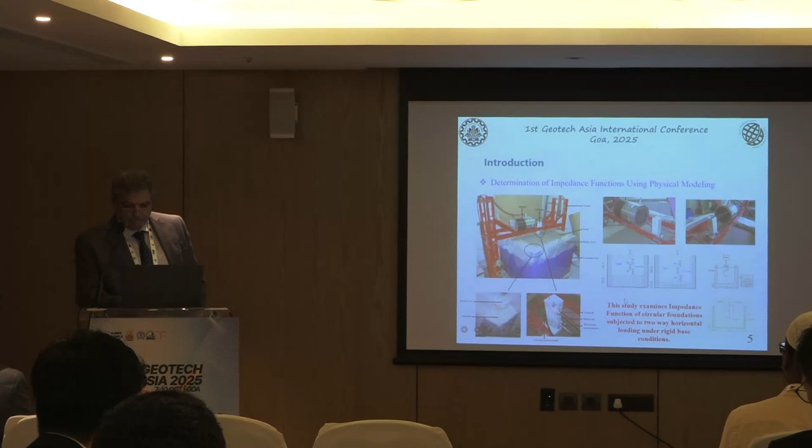For simulating the rock foundation, we used concrete blocks with different thicknesses for checking the effect of depth of foundation, depth of bedrock. So in this study, we examined the impedance function of circular foundation subjected to two-way horizontal loading under rigid base condition, as I mentioned.

Of course, we had some instrumentation: accelerometers, soil pressure meters, LVDTs, and so on.

And for preventing issues, because we applied sinusoidal loading with these shakers, for isolating the model from returning waves from the boundaries, we used about 10 to 15 centimeter thickness of sawdust in the bottom and in the side walls of the model.

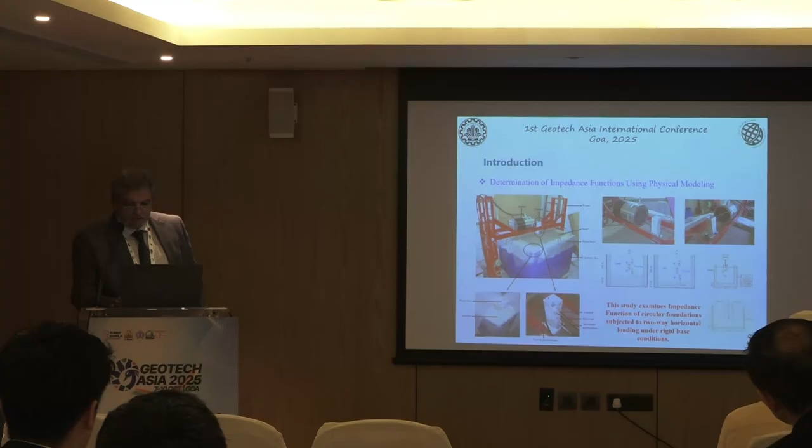Here are some details about the model preparation, which I'm skipping. Again, we used a kind of uniform sand, Babolsar sand, which is from the north coast of Khazar Sea in Caspian Sea, northern part of Iran. We used the air pluviation method, with the density of the models about 54%.

Some pictures of the instrumentation: different B and K shakers we used, and also instruments for the measurements, data logger, and so on. This is one of the typical foundations which was used as a model of footings, made from concrete.

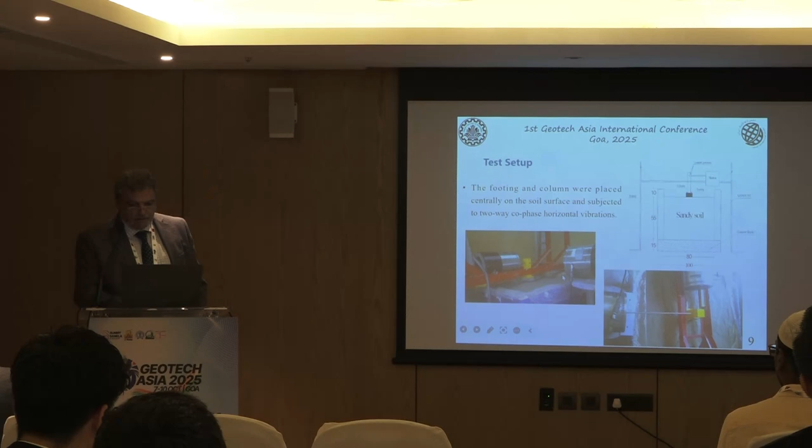Here you can see the general setup of this paper. Two horizontal shakers, perpendicular to each other, applying the load. Co-phased horizontal loads were applied to the model, shown in side view and top view. You can find the full details of the test in the paper.

If we go through the basic relations, we can show that there is a parameter kh related to the dimensionless frequency A0, which is related to the stiffness, and also ch, which is also related to A0 and can be meant as a damping parameter. In most of the relations in soil dynamics, you are seeing this.

I'm going to conclude. Just two pictures here - in this test, effect of foundation embedment is shown. We had no embedment in some tests, and also one D to H, where D is the diameter of foundation and H is the embedment, which was the same as the foundation diameter. The effect of embedment can be seen in this one.

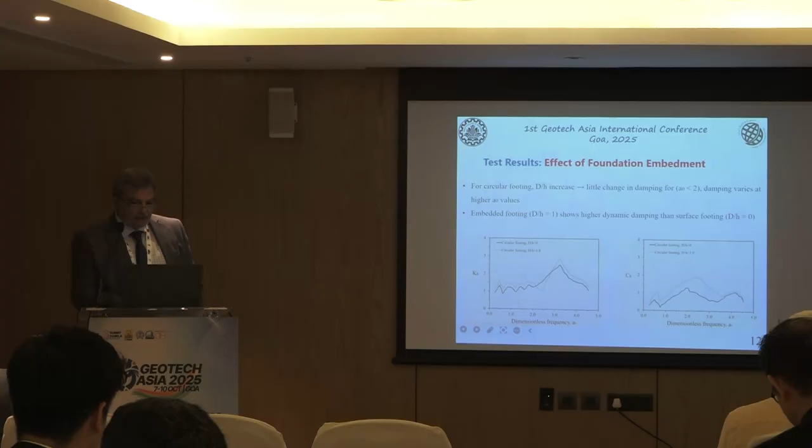This is for KH with A0, and CH damping with A0. Another test, as I mentioned, looked at the effect of foundation weight. Foundations were concrete blocks, 2.6 kilogram or 4.3 kilogram, two types reported here. We can see again there is some change based on the weight of the foundation for different A0, or dimensionless frequencies.

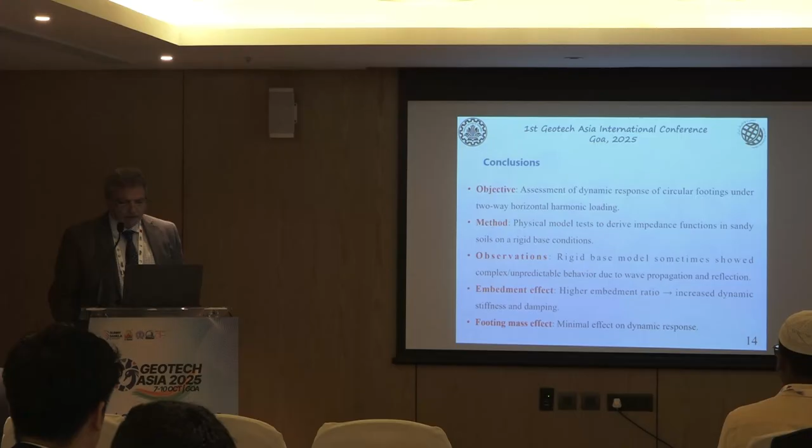Please, if you are interested, check the paper. As a conclusion, the objective was assessment of dynamic response of circular footings under two-way horizontal harmonic loading. The method we used was physical modeling tests. Observations showed the rigid base model sometimes displayed complex, unpredictable behavior due to wave propagation and reflection. The effect of embedment: a higher embedment ratio increases dynamic stiffness and damping, as we saw in the graphs. And the mass of the footing had minimal effect on dynamic response.

Some references, as you can see, and thank you very much.

I think everybody needs that coffee. Thank you so much. Thank you very much. If anybody has a question? Okay, thank you so much. Thank you, thank you Mr. Okay, Chairman, so thank you so much for all the speakers.